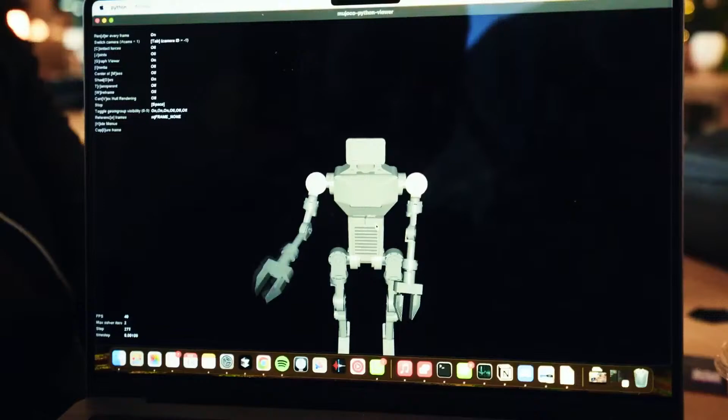I want to show everyone a video of someone building a kitchen robot in 30 days, leveraging K-Scale tools. That would be very exciting. Let's see. Okay, so somebody is going to be chefing it up using this, and then it'll translate to the robot. Yeah, exactly. And we have the mini robot, which is just a scaled version of the big one. A lot of it was printed here.

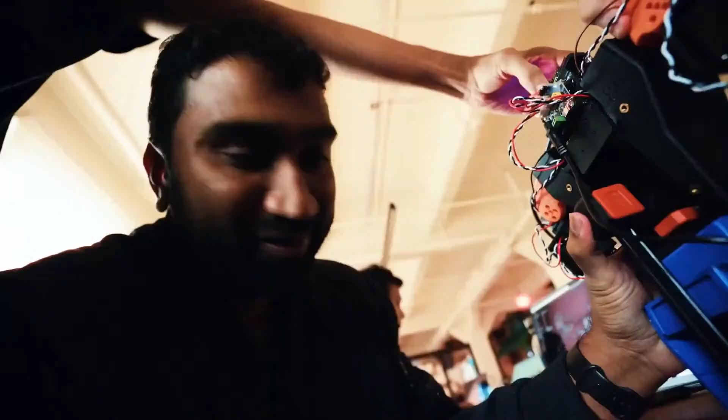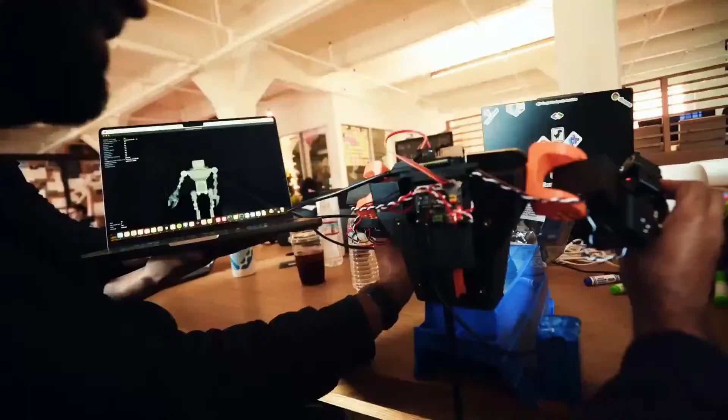So this is going to be used in commercial kitchens, for chicken tendies and flipping burgers, and all that data goes into a machine learning model, and then it becomes fully automated. Keep cooking. Make robots. Cool. Good.

So, Paolo, can you tell me a little bit about the software behind K-Scale? Yeah, sure. When we started K-Scale, when Ben created the whole project, one of the biggest things was accessibility to tools that make you much faster when it comes to building robotics, especially humanoid projects. If you look at our GitHub, since we are open source, we share not only the software but sometimes our Scrum meetings, if you want to truly join us in building. We try to share everything that is required to build a robot yourself.

And if you think about it, that starts from the design. We allow people to take their CAD design and put it into a URDF. From the URDF, you want to work in multiple simulators, for example to train your models. So we allow transferring between URDF and other files, especially XML used in simulators like PyBullet or MuJoCo. Once you have that, you'd like to train some basic policies like locomotion. So we created libraries where you can put in your XML file and train a policy with a simple gait.

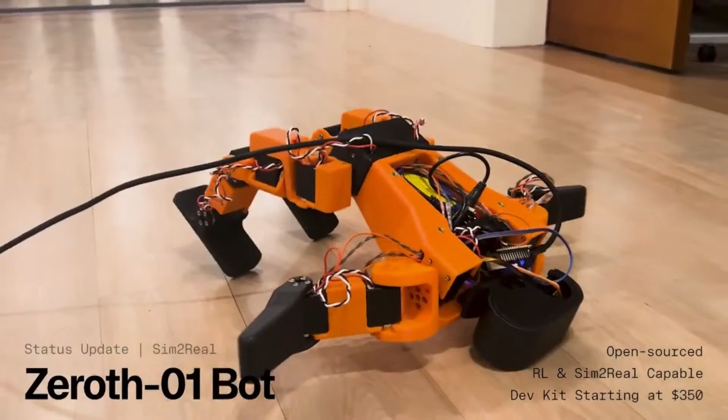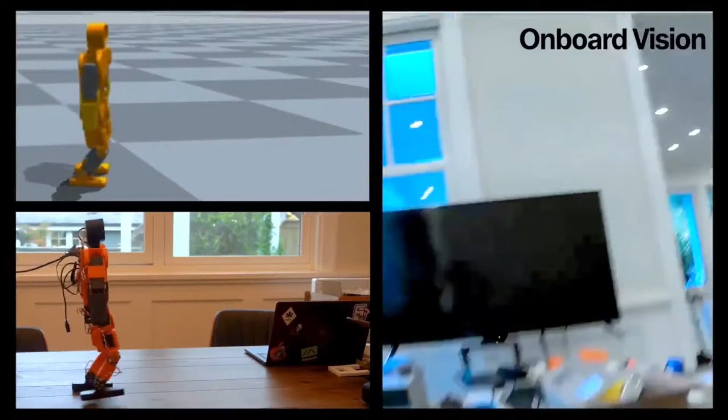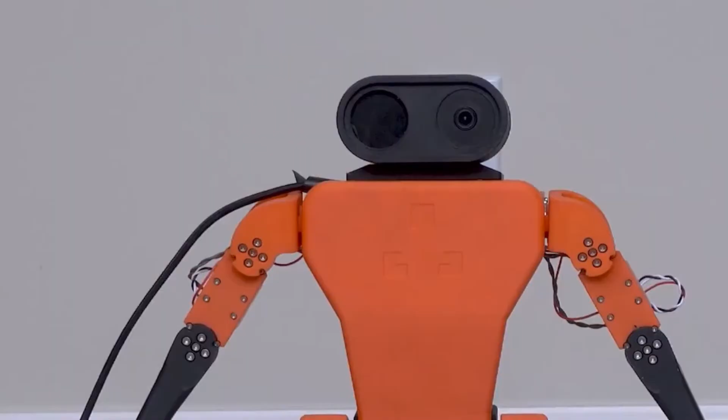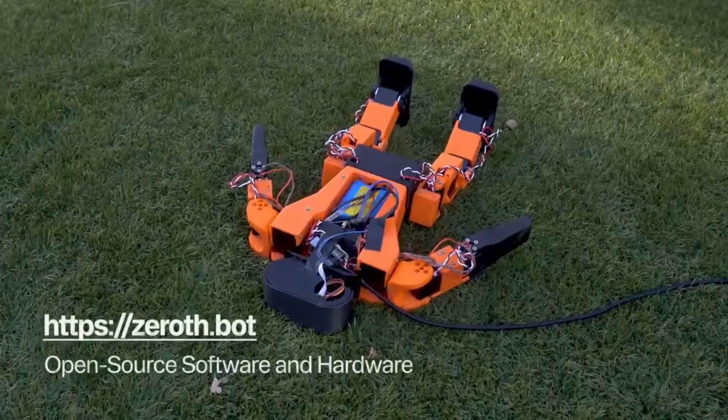But before that, we want to play the video, but we have some issues with OBS. I want to show everyone how people built this Zbot at the last hackathon. Yes. Nice. We're back. Okay. All right.

Yeah, I can talk a bit more about what we're building here. Can people see my screen? Okay, there we go.

All right, there we go.

I'll just give a quick overview of what our company's built and what we are excited about sharing with the open source community.

All of this is available on our website, docs.kscale.dev. We have an operating system for controlling humanoid robots. This is a bit different from ROS because we want to make it simple - basically all of the drivers for the cameras, microphones, IMU and stuff are built into the operating system, so you just install it and it works. You don't have to mess around with a long installation process. The interface is through a Python SDK that talks over a gRPC HTTP server from the OS, letting the OS be in real time.

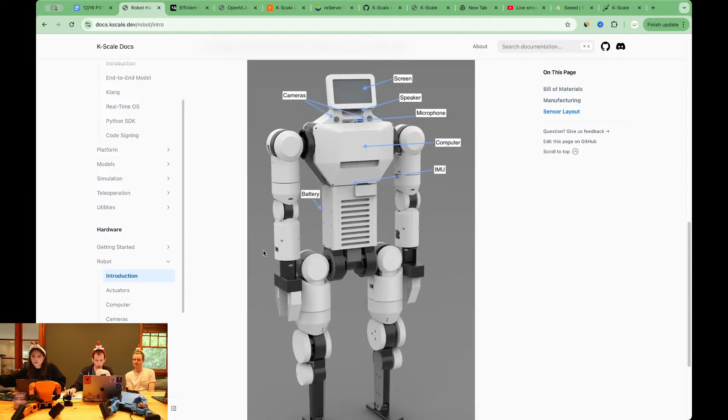This is a diagram of where those sensors are on the robot, so if you want to look that up, very happy to.

I would actually like to show a quick live demo, and I apologize if this is slow or if it doesn't work super well, but I'll give you a quick live demo about how you can make your own robot.

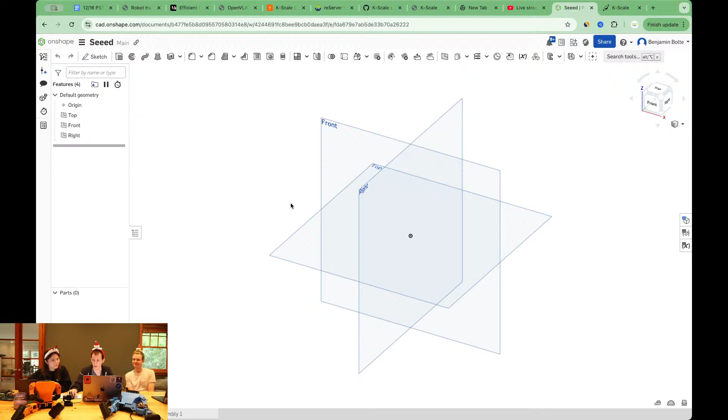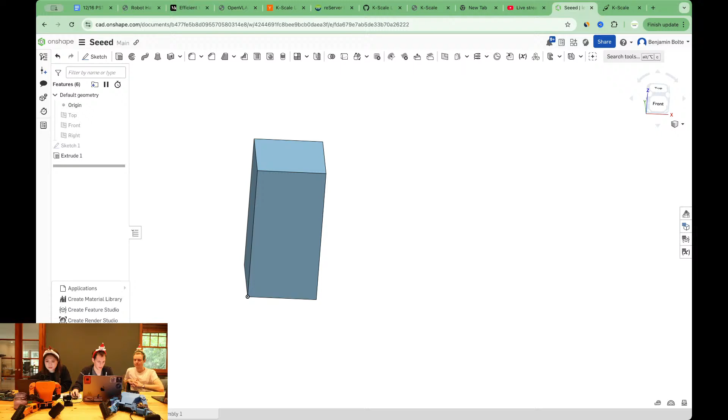So I have my fresh Onshape file here. We can start by making a really simple, very simple extrusion. Let's say that guy, and then we'll call it leg, and we can go ahead and make another one for body.

This is something you would spend a lot more time on, but I'm just going to give a quick overview of how you can get a CAD model to train an RL policy. Let's do a really simple robot - we'll just do the legs and the body.

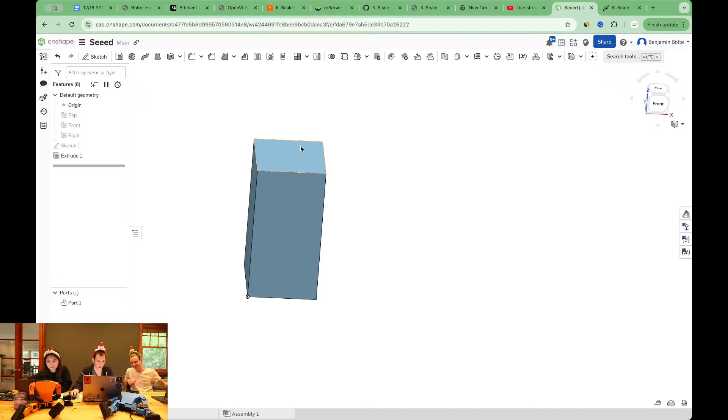We want to define, in order to simulate it well, the weight of the objects and the density. So let's just say we're going to make this out of ABS plastic - go ahead and assign material here.

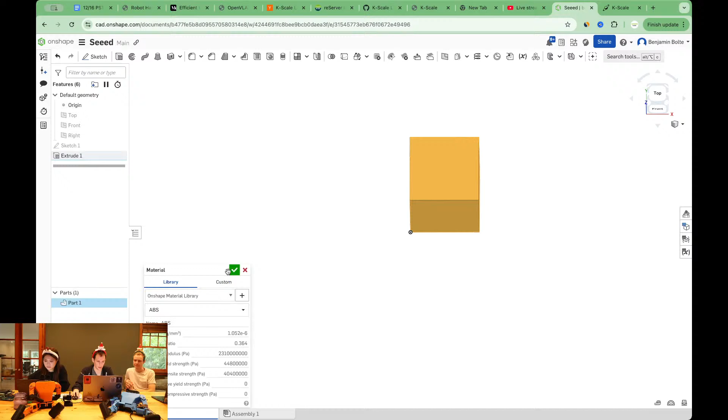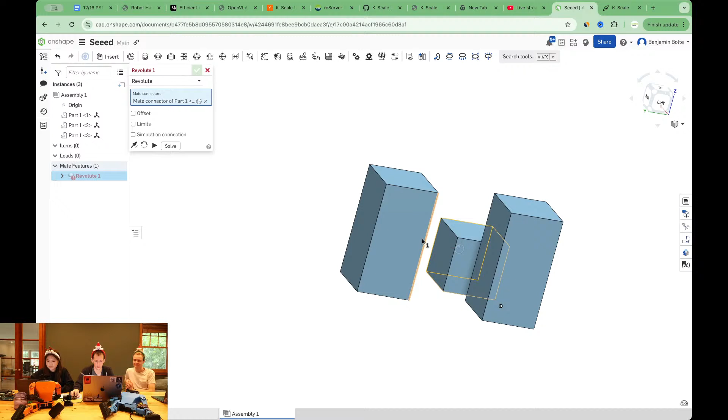And then we can go into our assembly and just make the body and two legs. We'll define revolute mates between the body and the legs - make a little revolute mate there, make a little revolute mate there. The last thing is we want to make sure we have limits on this, so I say minus 90 to 90, and minus 90 to 90.

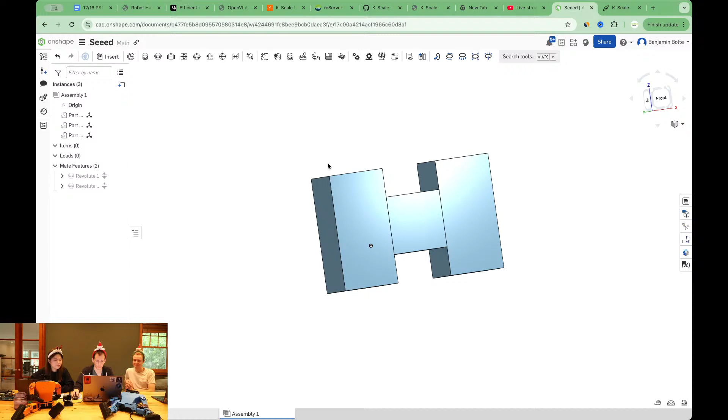This is a very simple robot, it's not the best robot. I guess if we were to try to make it walk, we might have some issues, but for the purposes of this, we can show what we can do.

First thing is you want to share your model - basically share it so anyone can access it, so this turns on link sharing. Next you can take this link and go over to dashboard.kscale.dev. Actually, if you go to kscale.dev, our website, it's this link in the upper right corner. You can log in and it takes you here.

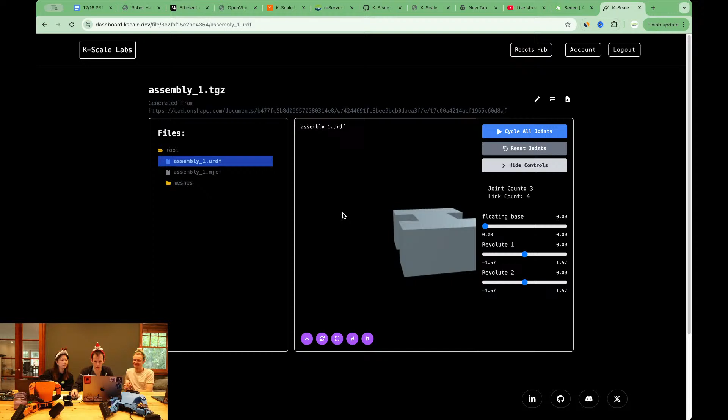We built this pipeline entirely open source, so you can go to github.com/kscalelabs/onshape to view the source code for it. There's no mystery - we just wanted to run it on the website so people can share the assemblies more easily. And if you want to download the URDF, you can hit download files or view listing.

So that's a very fast introduction to how you can make your own robot design and make the simulation artifact. The next step is taking that URDF you've generated and training a policy to make it walk.

You can go to kscalelabs/sim and look at some of our examples. We have, for example, in the getting started section, some pre-trained walking policies. If you go to sim/resources, you can see some of the other robots that the sim library has, like the Unitree G1 or GPR, which is our own full-size humanoid. Oh, maybe that link's not working.

So yeah, training the policy is pretty well documented. You want to use an NVIDIA GPU. We use a 4090 for our training purposes. But you can see the training scripts, everything you would need to get started training a policy.

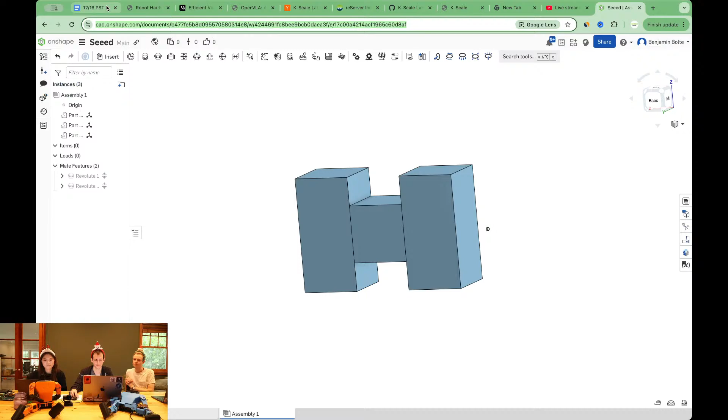That's very nice. Yeah, so then as we're, okay, I need to make sure I speak louder. So it's okay right now. Okay, I will speak louder.

So talking about how you get tools made very accessible. Your mission is making it so everyone has the platform, so everything about the humanoid robot is accessible to the developers, and in the future, customers and users.

I want to address some challenges right now for building up the humanoid robot. Humanoid robots are so popular, it's a hype right now, but it's not accessible, literally not accessible for everyone to build. There are several challenges like hardware and software, and also research.

For the hardware, I don't think everyone can build their own Unitree G1. Unitree is super cost effective, I know, but not everyone can pay for that or build from zero - the mechanical design, gathering all the hardware. So access to very easy to use hardware, a lot of easy to use hardware packages, and getting all the hardware compatible with each other - that is a very big challenge, right?

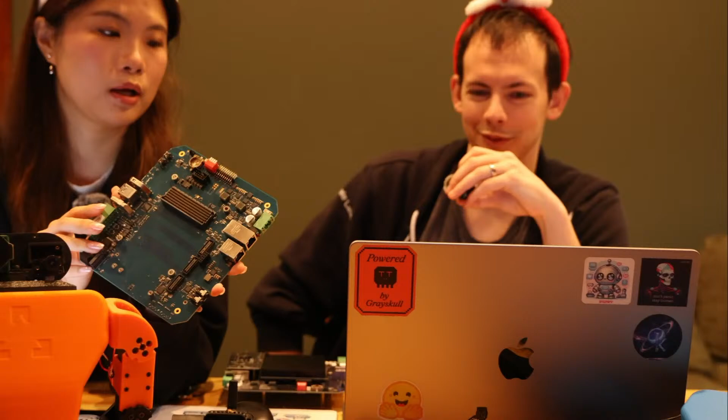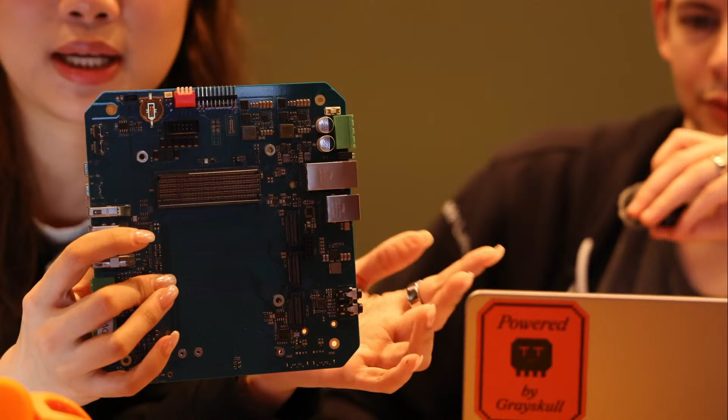Okay, so this is the carrier board for AGX Orin we already released, called reServer J501. We designed this for generative AI and also robotics, because using AGX Orin, it can deliver up to 275 TOPS of AI performance. What's more, it's very good to use for both production and development.

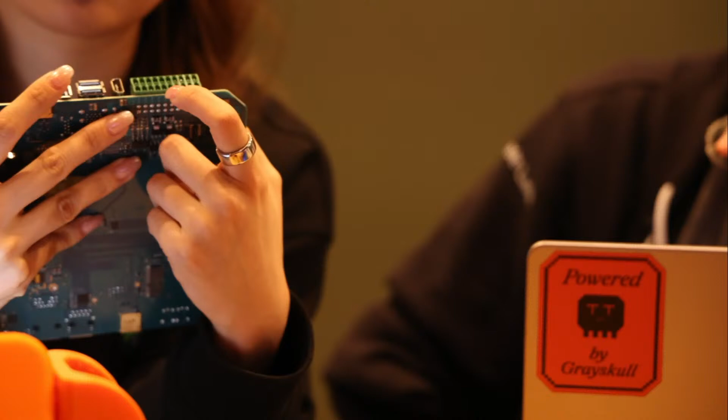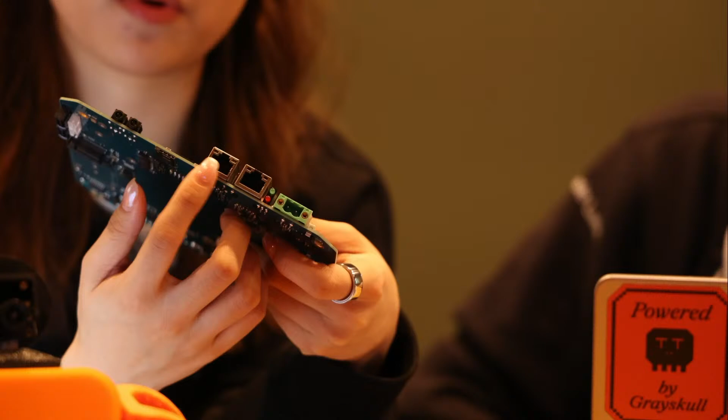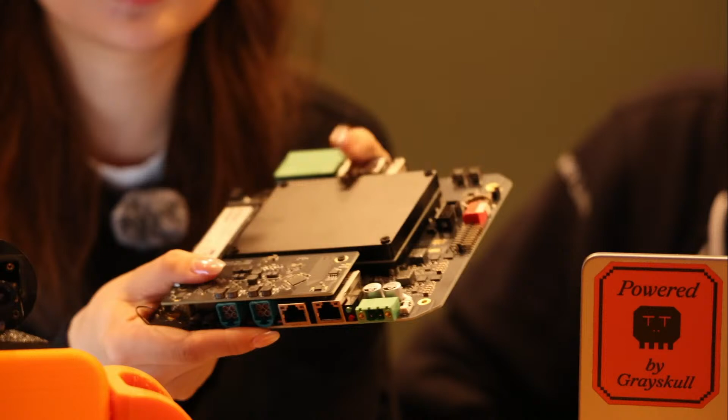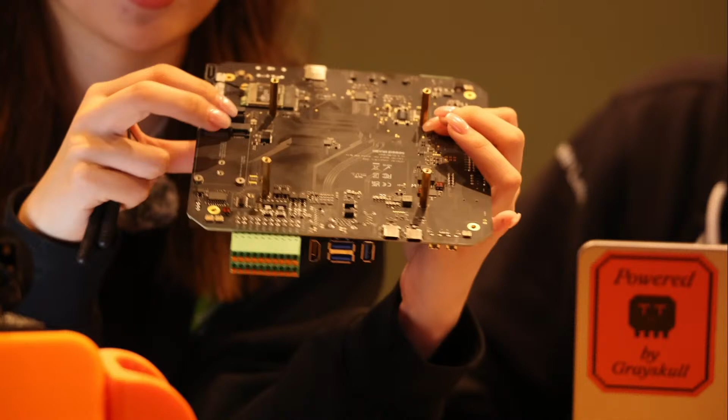So we have another adapter, the GMSL boards. This is adapter boards. K-Scale right now is also using the GMSL camera for their robots. And on the back we have mini PCIe for 4G, 5G, and also SSD. So yeah, that's all the interfaces for this board.

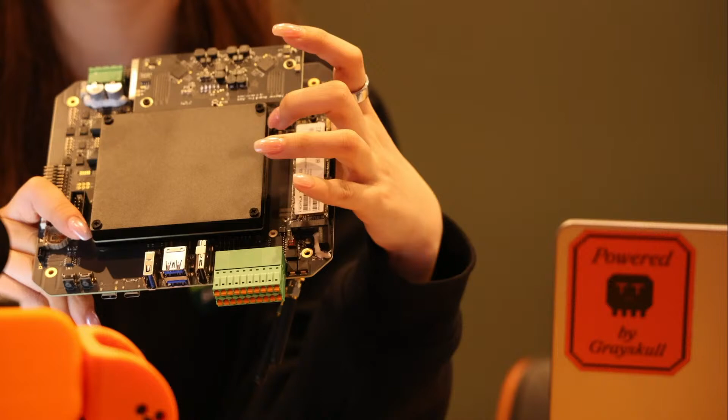What else? We have some USB Type-C for debugging. So that's all for this board. Now here is attaching the AGX Orin Jetson module.

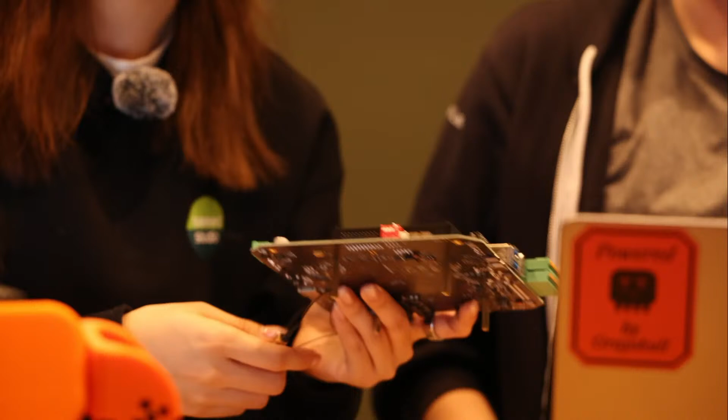So Ben, tell me about how you leverage this board, because this board is for the heart of the robots, but what's the peripheral you're connecting with?

Yeah, I can talk about how we ended up with Seeed. Actually, we were exploring—like a lot of other US startups—trying to find really good carrier boards for edge devices like the NVIDIA AGX. We actually made our own carrier board for the Jetson Nano. But when I met with Seeed in July, I was just looking for a board that would work reliably and robustly. So we ended up going with the J501 board because it has all the peripherals that we need. We are using CAN to communicate with motors.

We're using GMSL cameras. It all kind of just comes packaged with the board, so we could focus on basically just building the operating system and the software rather than messing around with a bunch of drivers. The CAN is isolated ground, it's all done correctly, so we can just focus on making the robot work.

So maybe I'll add a little bit. If you think about a typical build-up for a model that you want to work on top of that board, we're thinking about long-term vision—we know that at the end of the road there's going to be one model that will take audio, take video, take proprioception from the robot. So if you take this assumption, when you start building up the whole thing, the board needs to provide all of this.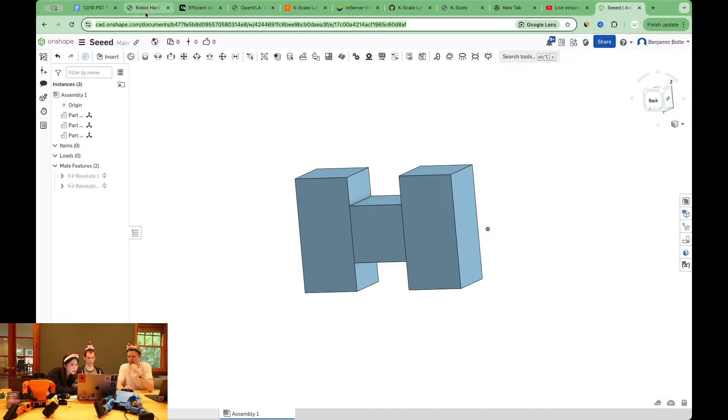The reason we need that speed is that when you add locomotion and manipulation together, you're constantly trying to balance the robot. While interacting with the environment, the environment might be pushing you, or there might be uneven terrain, so you have to quickly adapt. That means we have to make a decision almost every 10 to 20 milliseconds, even if we're doing a very boring, slow task like folding the laundry. One of our holy grails is to reuse pre-trained large VLA models, or train our own, that have huge capabilities but at the same time are small. So there is always a trade-off.

In that release, we are reusing large models like Llama with some pre-trained vision encoders, but we make them generate predictions about what to do next as a robot and the setup of the joints, not in an autoregressive manner, so that gets us the boost. There is a lot of research happening right now to make things faster, to use diffusion models, and as a community we are getting to the place where we will be able to do it with very large models, starting from 1 billion parameters. We still don't see a lot of this being open sourced, so we're trying to make it more accessible, because then there's going to be more data, more people running these models, and accelerating the general progress.